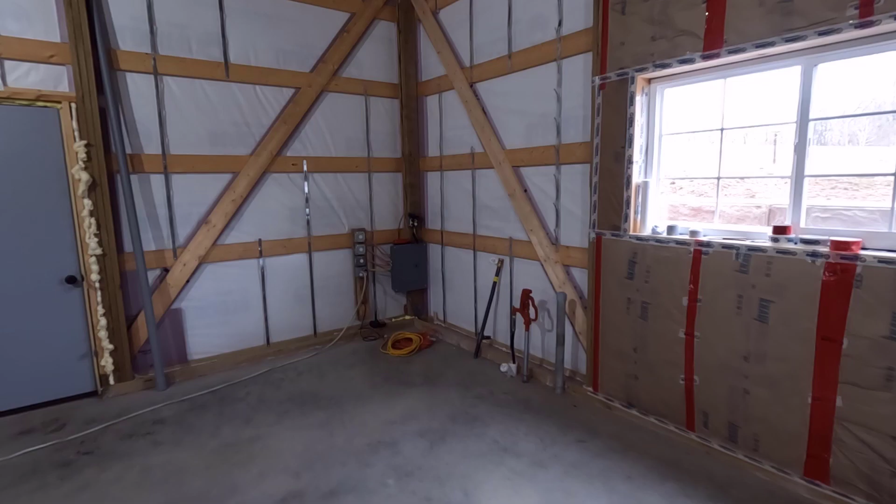Today I'm going to start installing the gas line into my post frame building.

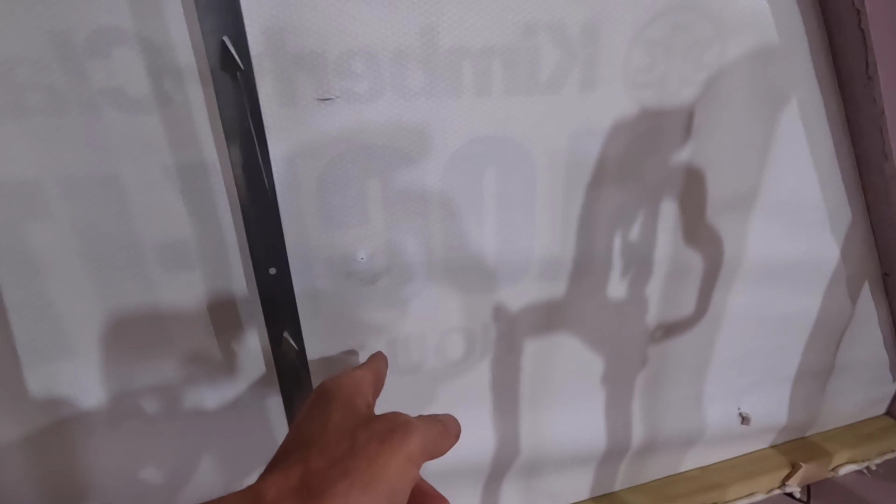Yesterday there is a gas line outside, a hose coming out of the ground, and it's just capped off. It's attached to our tank. You can't see the tank from here, but it's right over there. We have a line that goes underground up to right about here, and I measured the regulator on the house.

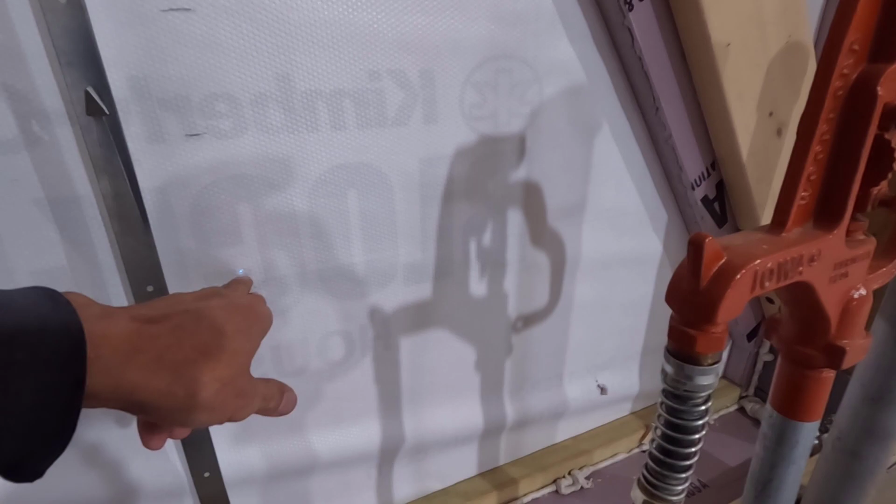Where it comes out of the wall, I measured the distance between the center line of the pipe going into the wall down to the fitting, and I came up with this height for the hole. This right here represents the girt that's going to come right through here, and this will be attached to the back of the girt. I have to open up this hole.

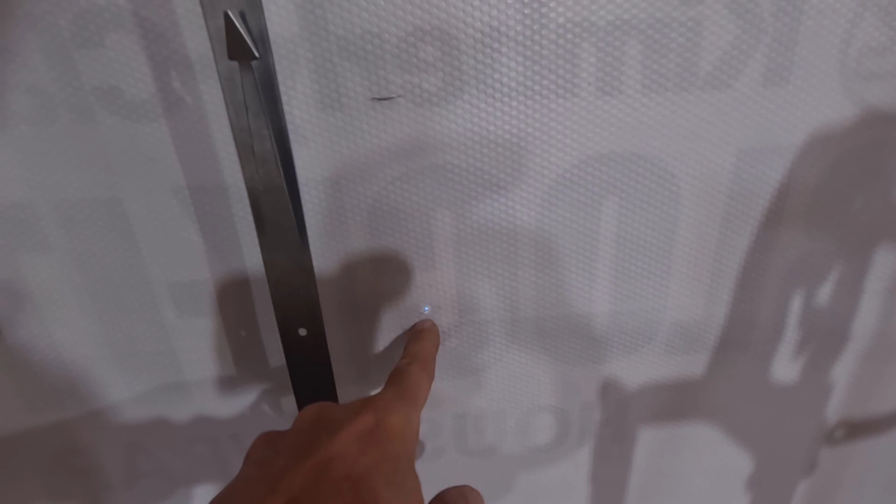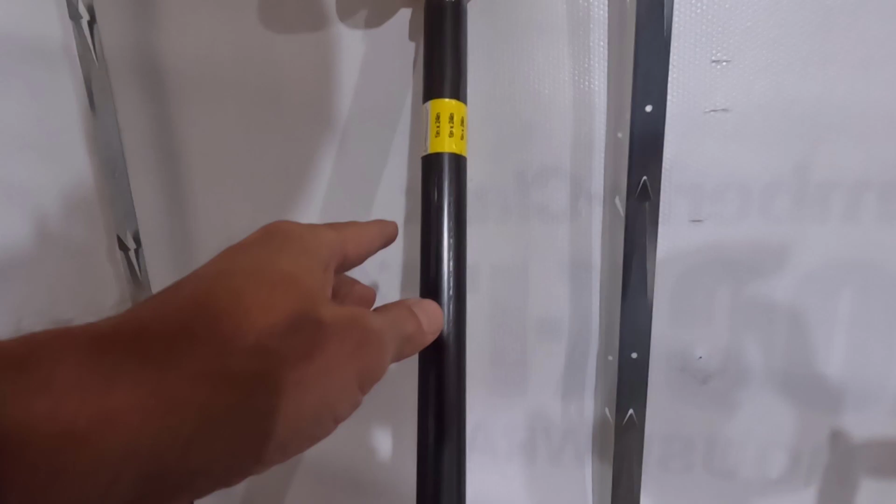This is going to be 1 3/8 inches. I have 1 inch pipe coming in, which is probably overkill, but I'm not exactly sure what's all going to be connected to this in the future. So I'm going to use 1 inch pipe up into the rafters up there, I think right over to that truss over there. And then from there, it's going to be 3/4 inch pipe going to the different locations.

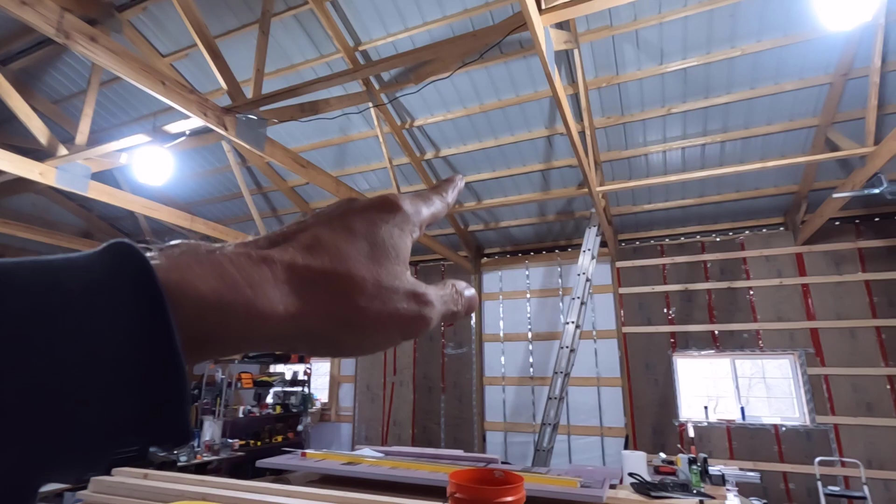Right now, there's going to be a heater right over there. So the pipe's going to go up and across, and then we'll have flex pipe going over to the heater. The joint up here is going to be a T, and we'll have another line going over into this area for a possible future heater.

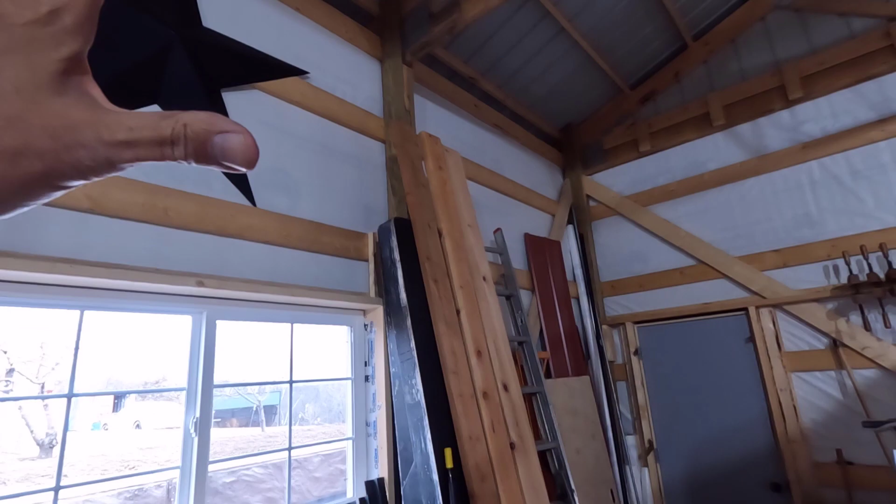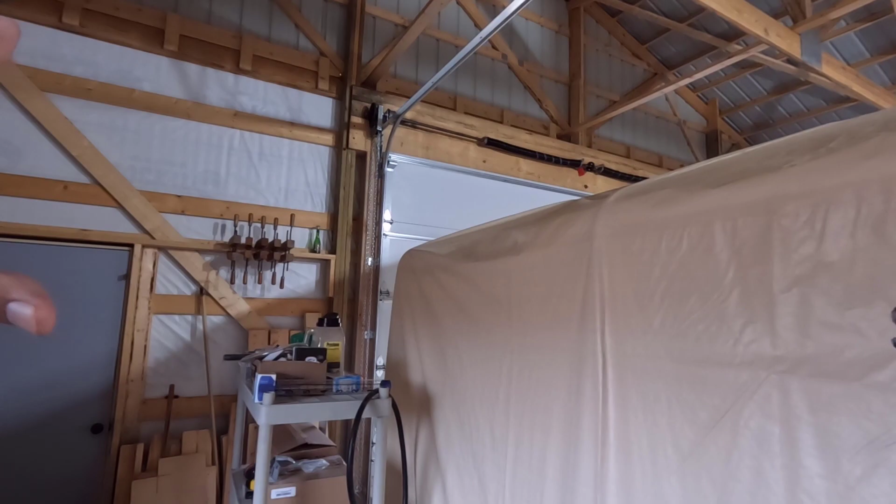This is going to be unheated space, but you can really warm up unheated space with one of these garage heaters. If we ever needed to work on a car or something like that in the winter, we could use it for that. I'm not really sure if we're ever going to do that, but I want to have the option for the future.

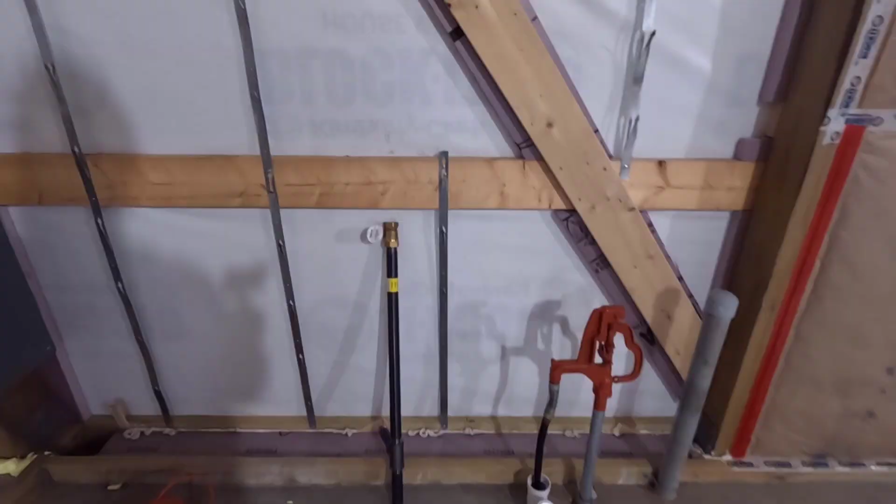This corner where the gas line's going in is the busiest corner in the building. It's got the water coming in, this is the permanent electric, and that's the temporary electric. A whole bunch of stuff has to happen for this gas line to go in.

The first thing I need to do, I have to go and shut off the electricity and unhook this box and this box from the wall, and this as well. I have to unhook all of this stuff and flop it down onto the ground right here. I didn't want to do that right off the bat. I probably should have. This doesn't make it all that much easier having it on the wall like this, but it is what it is.

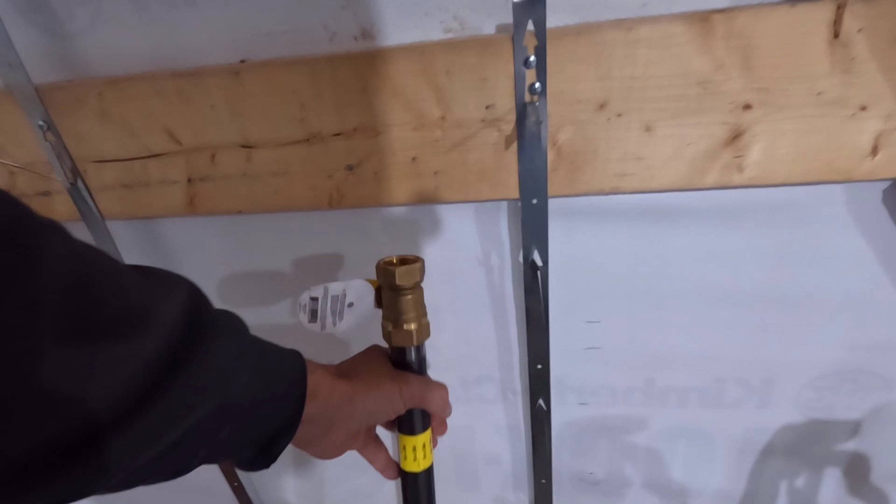I have to get this stuff moved down to the floor because I have to install 1, 2, 3 batts of insulation and then leave this open. Then get 2 girts in and attach my pipe to the back of the bottom girt right here.

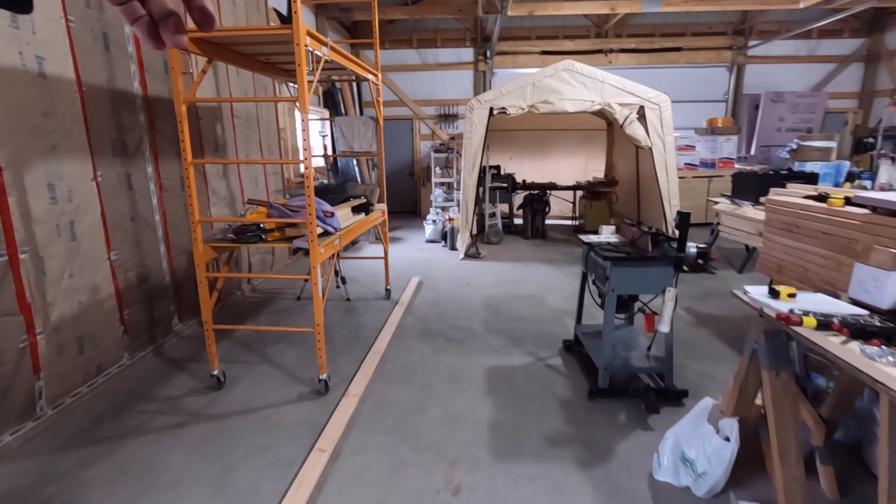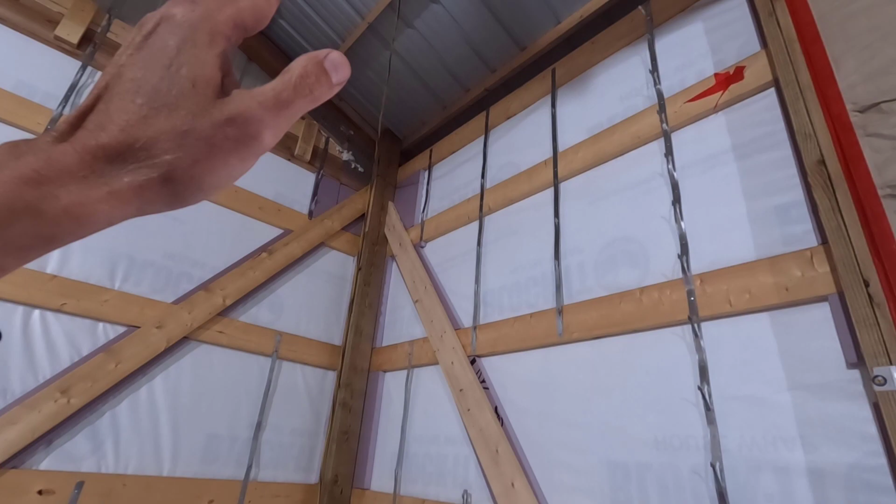Once that's attached, I have to take my other piece of pipe, I have a 10-foot piece over there. I have to screw that into it and loosely attach it up there and figure out what length it needs to be. I need to cut it, thread it, and then put an elbow on it.

That's going to get it over. It's actually going to come over right on the other side of this plate somewhere. So there is just a ton of work. This has to be cut down to 3.5 inches. A lot of work has to go on here.

And then once I have the pipe in place, I have to fit insulation around it. I'm not 100% sure how I'm going to do that, but I got a pretty good idea.

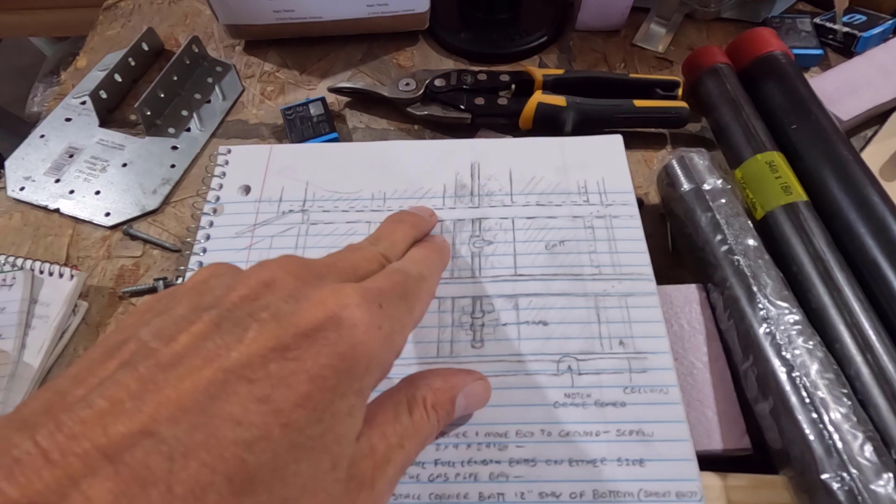I made a list of all the stuff I need to do last night. We got a batt here, a batt here, a batt here. There's the pipe behind the girt, this bottom girt. This is dashed because that won't be here at the time. So there's a lot going on with this.

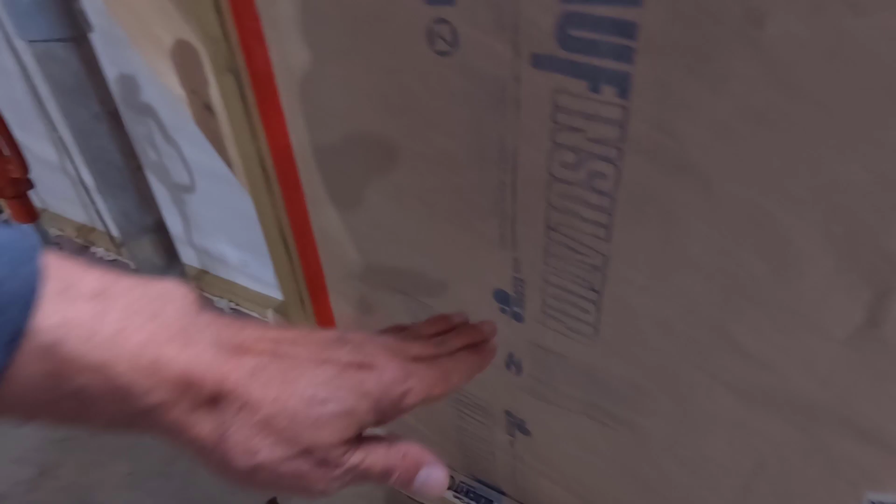There's the electric box on the ground. Oh, and I forgot to mention this: this corner batt is not going to come all the way to the bottom. It's going to be about 1 foot shy. It'll be cut about right there so that this area can be finished up.

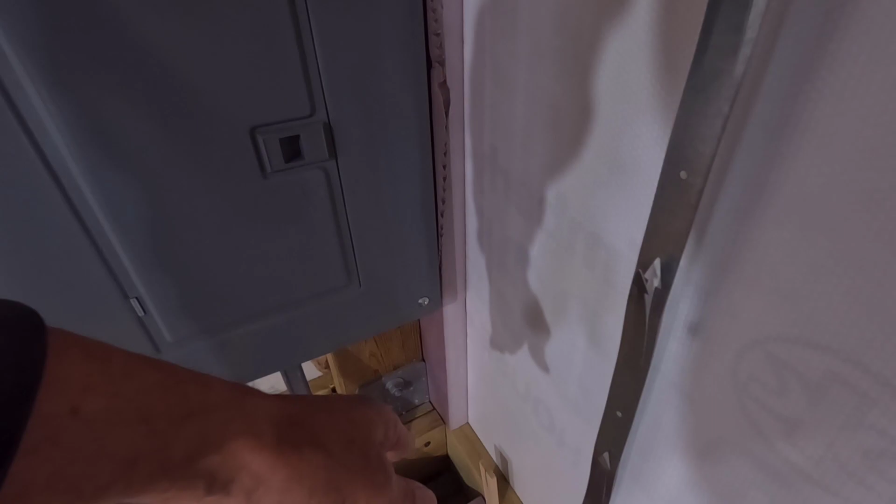Once the main electric is in place and I don't need this stuff anymore, this wire is going to be pulled back out. This will all be insulated. Then I'll put that last piece of batt into the bottom there.

Pretty complicated. It is pouring out there. Oh, not really, just the tin roof.

So I got to get out to the box there, shut off this electricity, and take everything apart, pull it off the wall. Then I can get started putting batts in here.

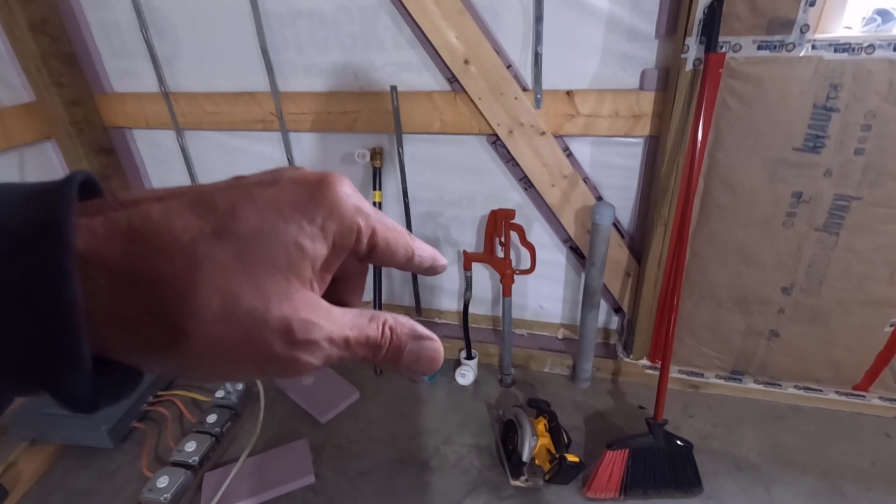Okay, I got that electrical work done, and I was going to clean up, but then I was thinking, I really need to get this stuff done.

I need to cut this pipe right about here. I have a jig for that. Then I got to take this bracket off, and I have to cut the grade board about 1/4 inch back so that this will fit on there.

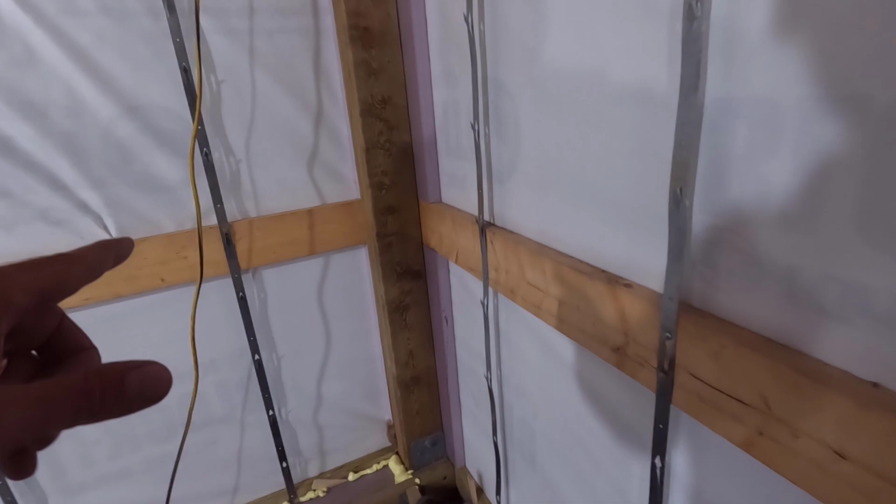I got to do a bunch of other stuff to it too, but before I clean up, I might as well get that done. Then I'm going to hang the batt in the corner, the one that only comes down to about here, and we're off to the races. Let's get this done real quick.

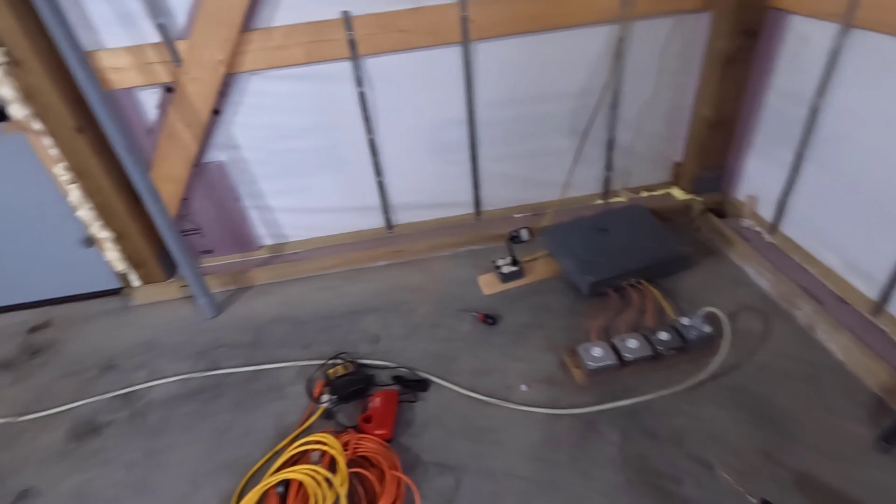As you can see, my little mess turned into a much bigger mess. Now I can get this all cleaned up and somehow squeak that ladder back into here so I can get this batt in place. Let me get this cleaned up first.

I already have a batt cut here, but that's not the right length, so I might as well cut all the batts right away and get them ready. Okay, let's get this done.

1 down, 2 to go. All right, that's 2 batts in. Okay, back to the drawing here. Electrical stuff on the ground.

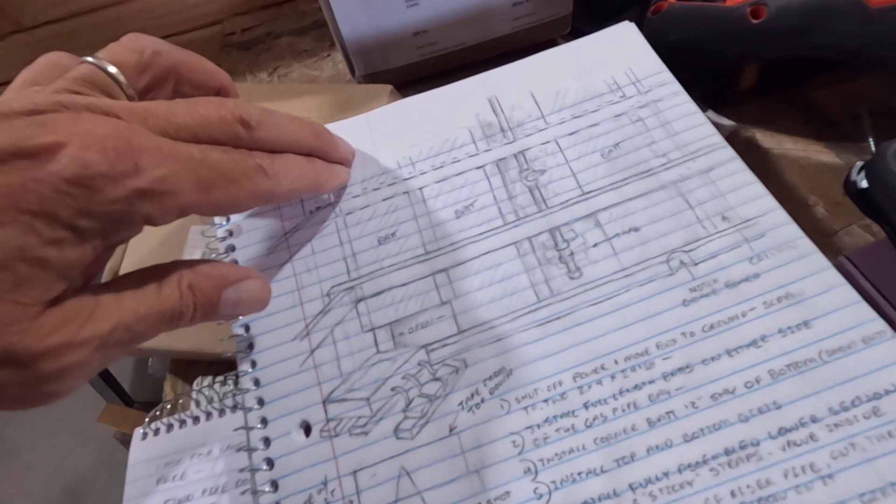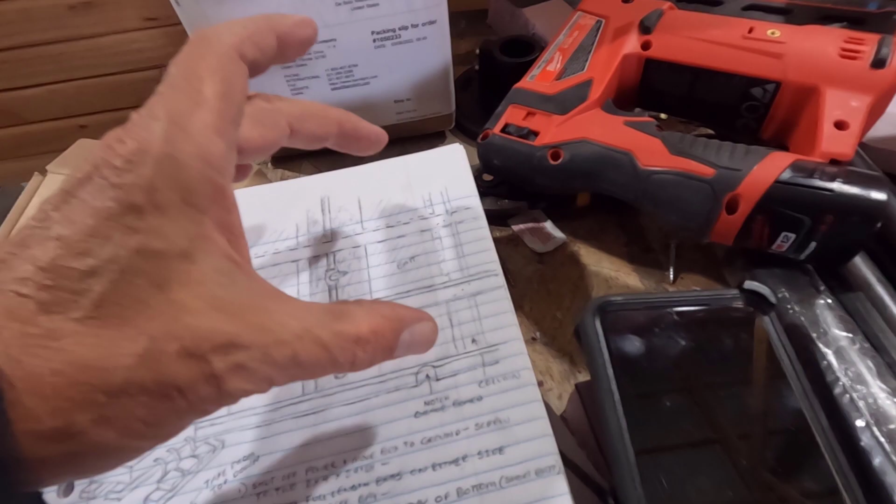We have a batt in here, and it's open at the bottom, like that. And we have a full batt in here. Then comes the gas pipe, then another batt. But the batt's got to go in first, at least 3 of them. So we got that 1 more batt, and it goes all the way to the right side.

Okay, I got my last batt in, got it all taped up and everything. Then I went around with my story pole, screwed it to the columns, and made all my marks for the bottom of the girts. Now that that's done, what step am I on?

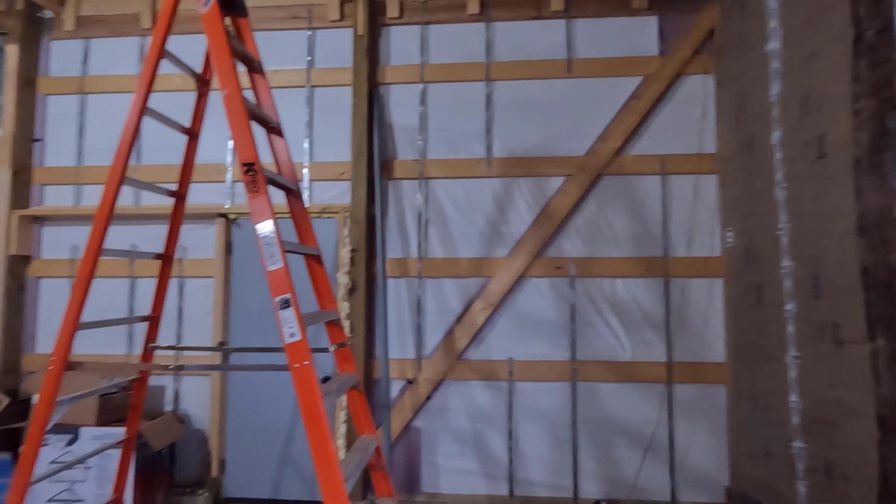I believe I'm on 4. Yes, install the top and bottom girts. To do that, I need to cut them to length.

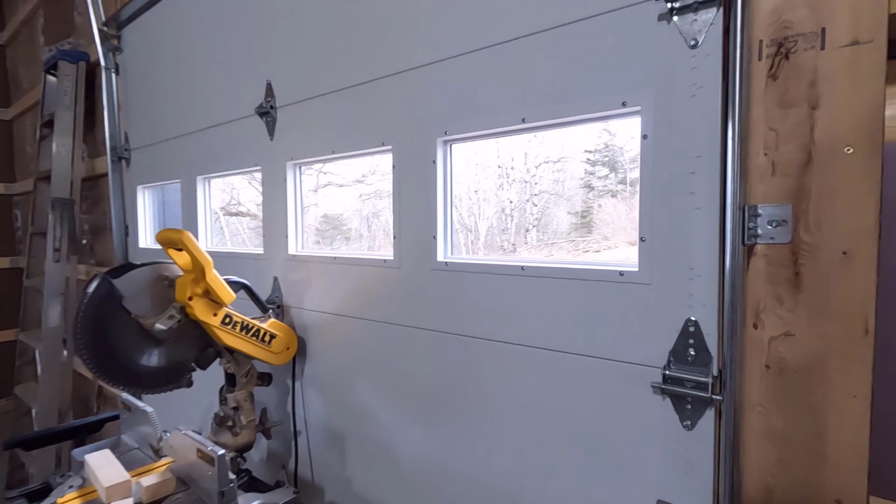So I'm hoping I can get a break in the weather. It was just raining really hard a little while ago, but now it looks like it's just pretty windy. All right, so I gotta run and go do something real quick, and when I get back, I'll cut them.

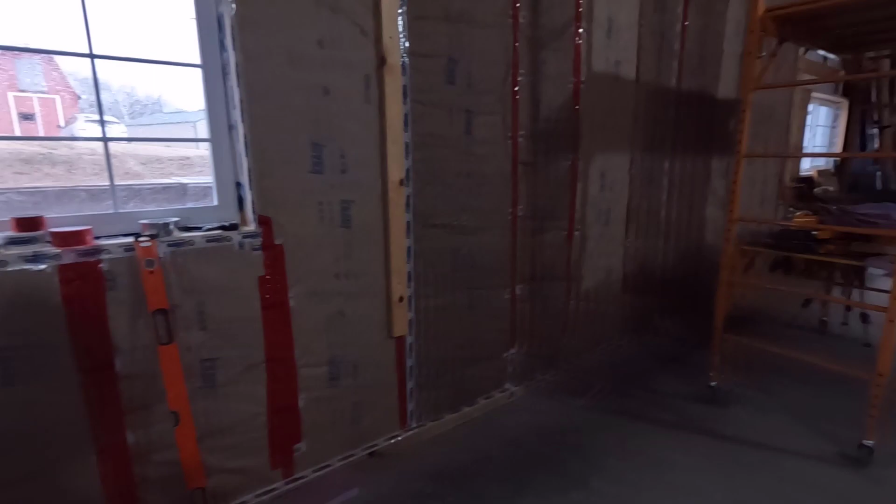Girts, we'll get them installed. Then I gotta run across the street to the machine shed. I have a real nice vise over there. I'll put it in the vise, get it all nice and tightened up, get the bottom capped off. Then I need to drill the proper size hole through the wall.

Hopefully the rain will be done. I got to clean off the outside out there. Once I get the pipe through there, I have to put like a tape flash over it so I don't get water coming in here.

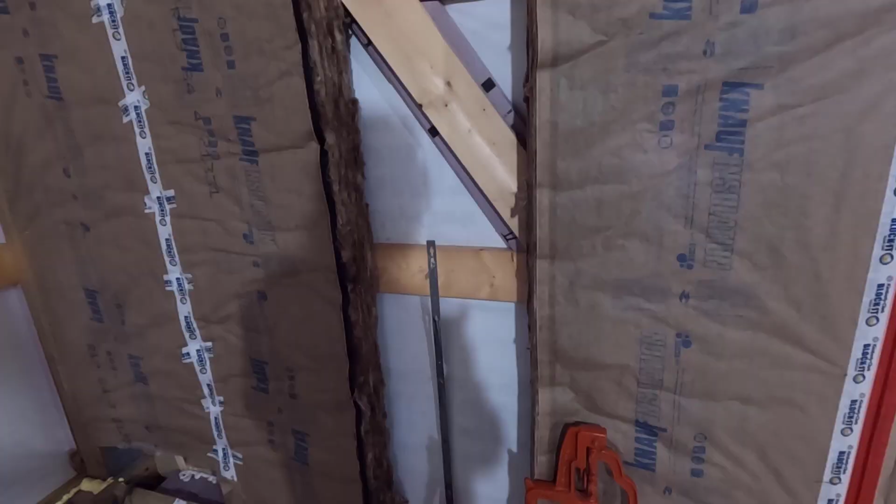I'll show you that when I get to it, but it should go a little faster from here on in, but I believe this is going to take at least 2 days, but we'll see how much we can get done today.

All right, I got that girt cut. It is super windy out there. Yeah, you could probably see that. And it's drizzling out, so I moved the saw just outside the door, got my cut done.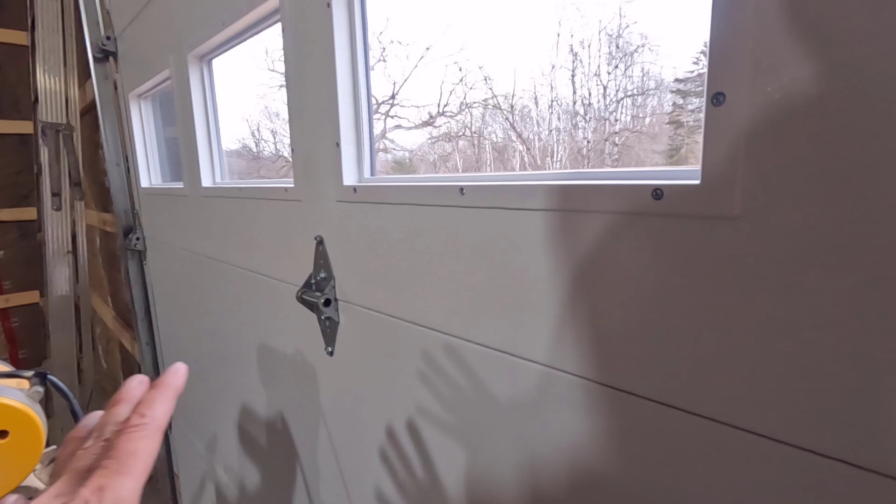Luckily, I only needed one. I had a girt left over from that wall there, and this is the one I cut. I got it installed right away. I have everything marked to get the rest of them installed, but the only one I'm installing now is the top one. But I'm actually going to do that tomorrow.

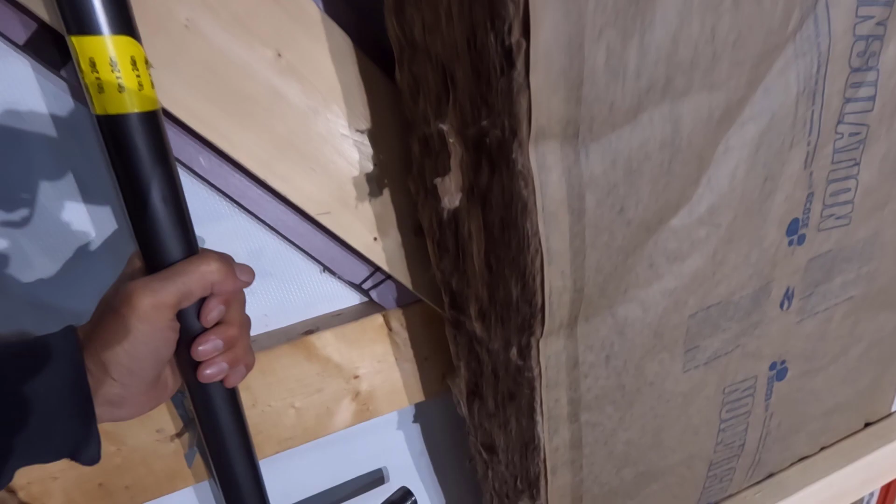And like I said, I got to get the tape on all this over across the street, and I'll be doing that tomorrow as well. So this is going to go in right like that, and it'll attach to the back side of this girt, and then I'll be screwing in the tall pipe that goes way up there to the top of this valve right here. But like I said, that'll be tomorrow, but for you, it'll just be seconds.

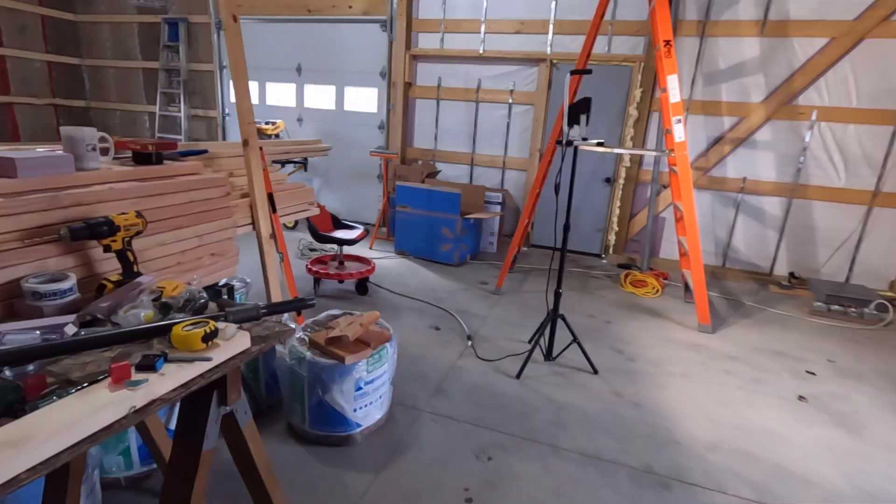It's actually 2 days later, but it's time to go get this all tightened up. This vise has been real handy over the years. That's a Yost vise, super nice. It has the pipe jaws on the bottom and regular jaws on top, and it's super adjustable.

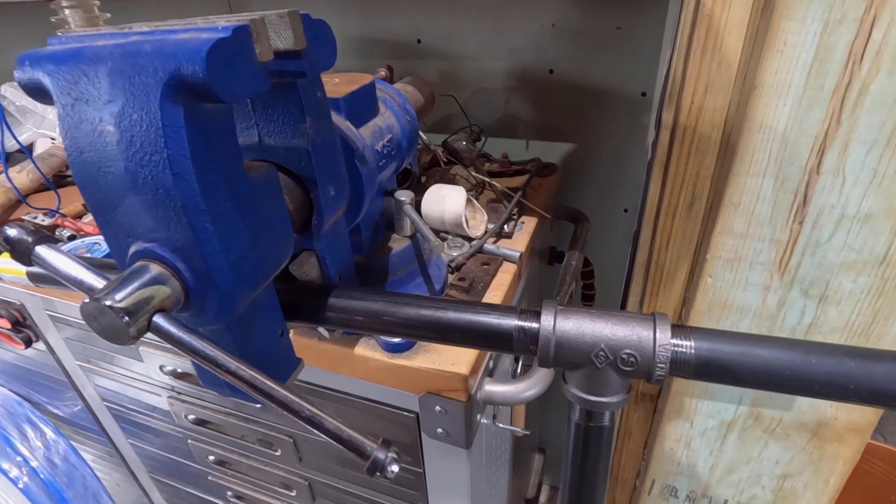Otherwise, we're going to get some tape on this and tighten this up. I'm going to be using Blue Monster pipe thread tape, and I'm not sure if you're going to be able to see this or not, but it's rated for natural gas, methane, propane, butane, and petroleum distillates. If your tape's not rated for petroleum products, don't use it.

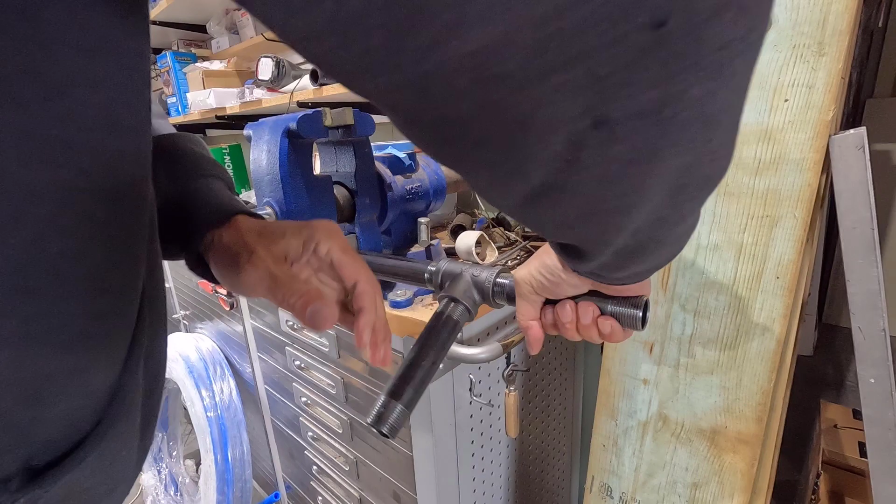Pipe only goes about halfway onto the thread. You need 3 layers of the tape, and it's going to take 2 passes to cover the area. So you got 1, 2, 3, and for good measure, and there we have it.

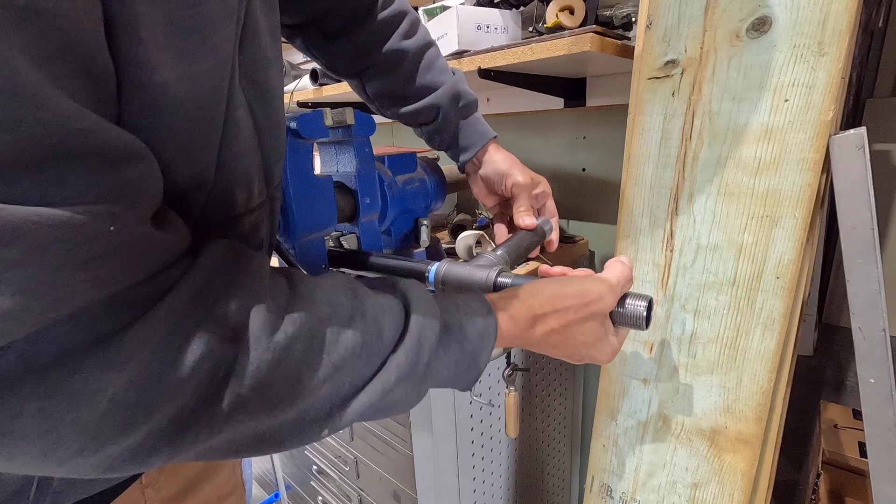Get that started, and I'll take this one off, and then tape this. Tape it right here.

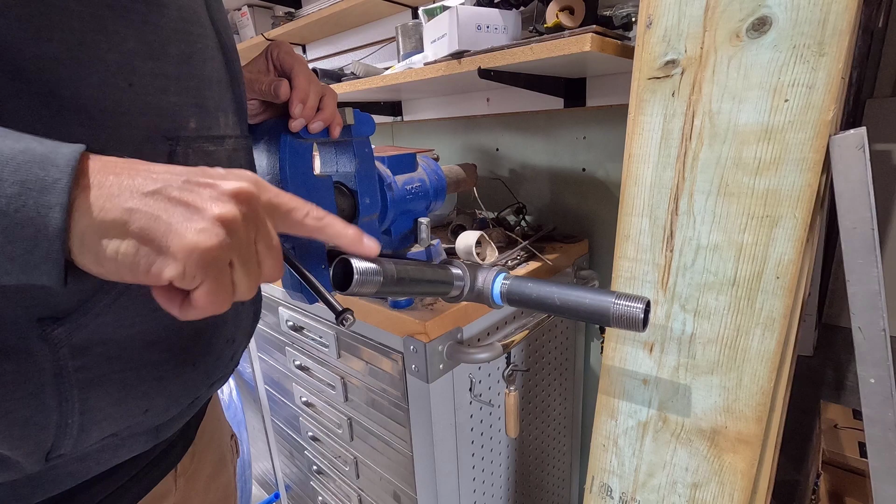Unfortunately, I couldn't find the cap for this, so I'm going to have to do that after it's installed. And actually, I believe I have to do this after it's installed as well, because I'm not 100% sure that this is going to be the right length. I think it is. Yeah, I'll just tape this anyways. If it's wrong, I can retape it.

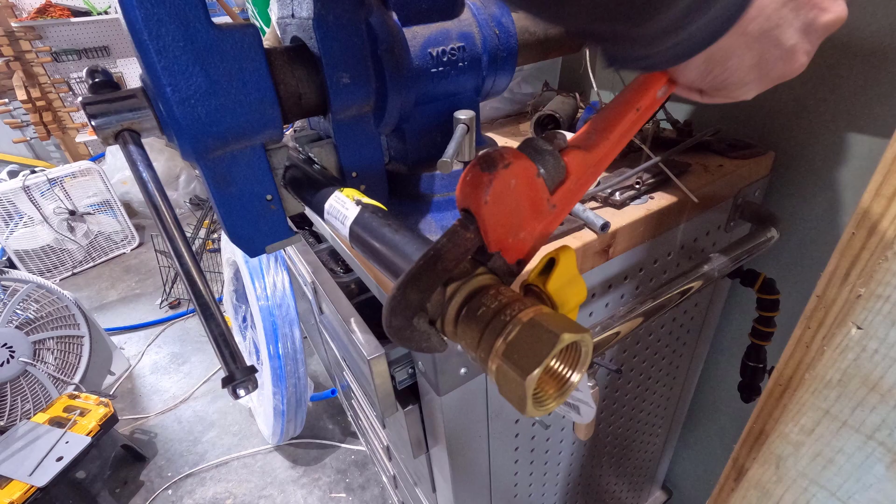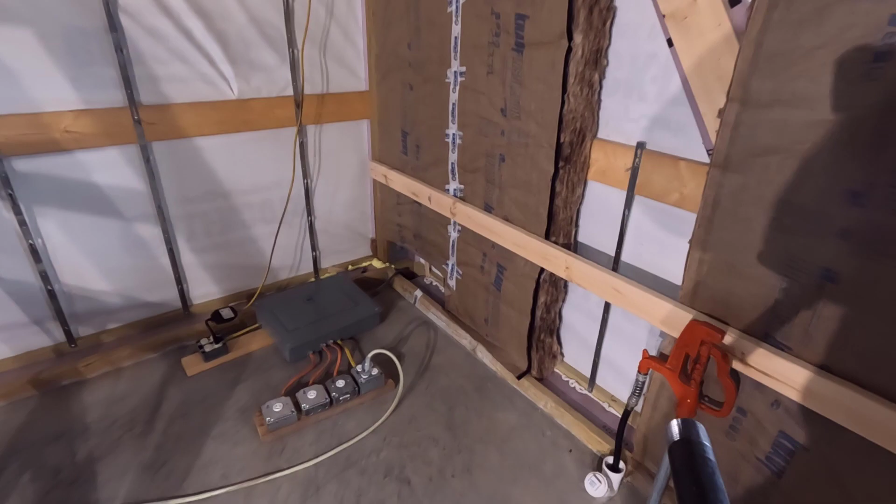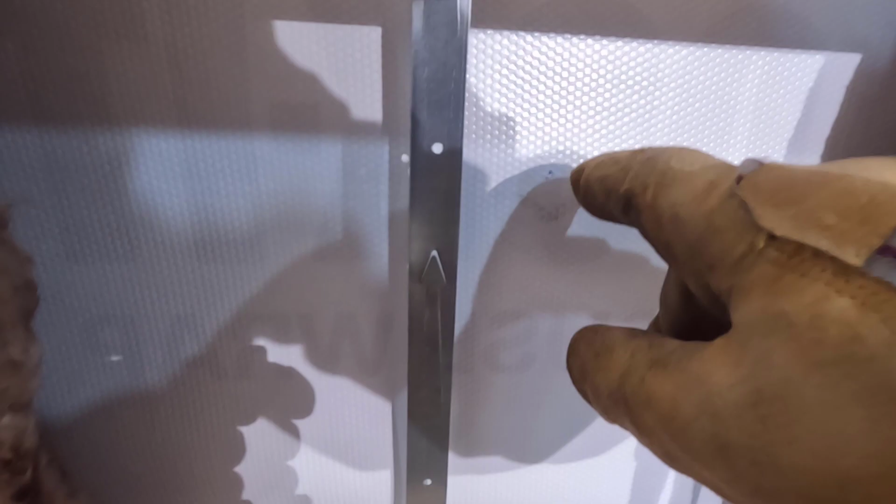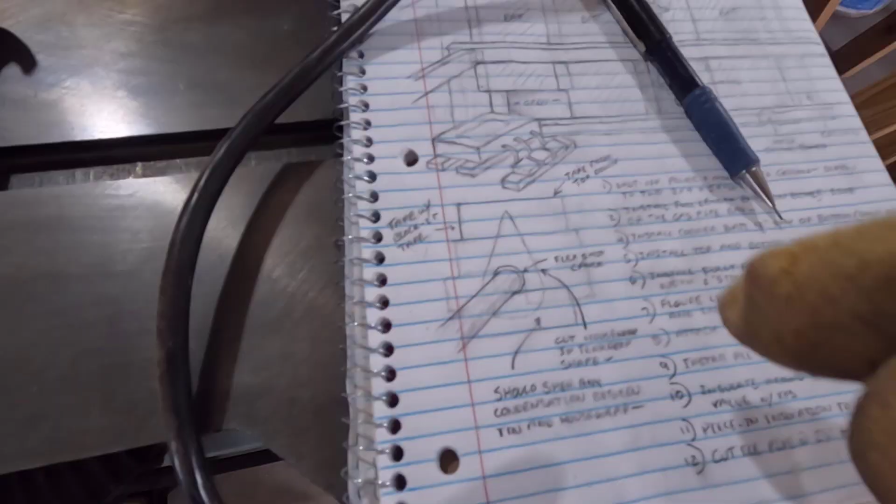With this entry assembly completed, now I need to drill the right size hole through there. But before I do that, I need to cut this house wrap in a teardrop shape, because condensation may form on the outside between the house wrap and the tin. As it rolls down, the way it is now, it goes down to the bottom of the trim and out to the ground. But if I cut that hole square and tape it up, I'll get condensation trapped at the top. If I don't tape it at all, any condensation will just run right into the building. So I have to cut a teardrop shape, so condensation coming down on the inside will hit that, move around it, and make its way out of the building.

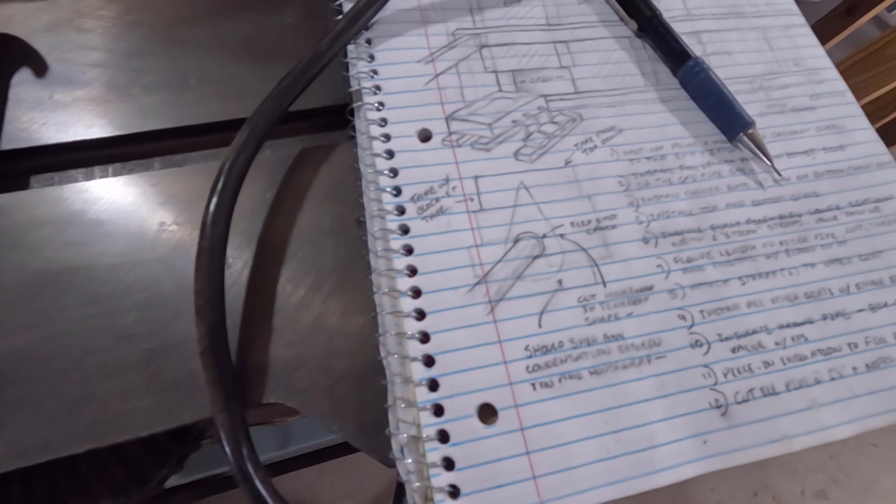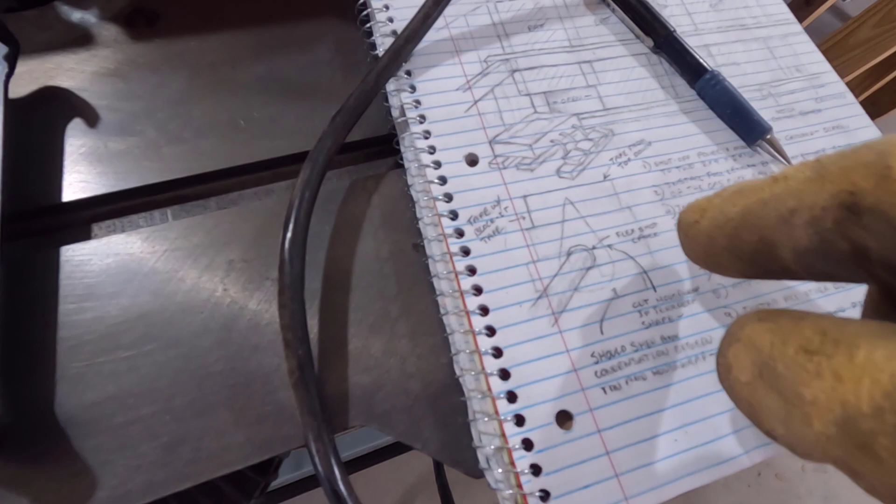I'm also going to seal this with flex shot caulk, but that hasn't arrived yet, so I'll just get this cut and get the tube through to the outside. That'll be all I can do with this area for now. Then hopefully I can get this next section in.

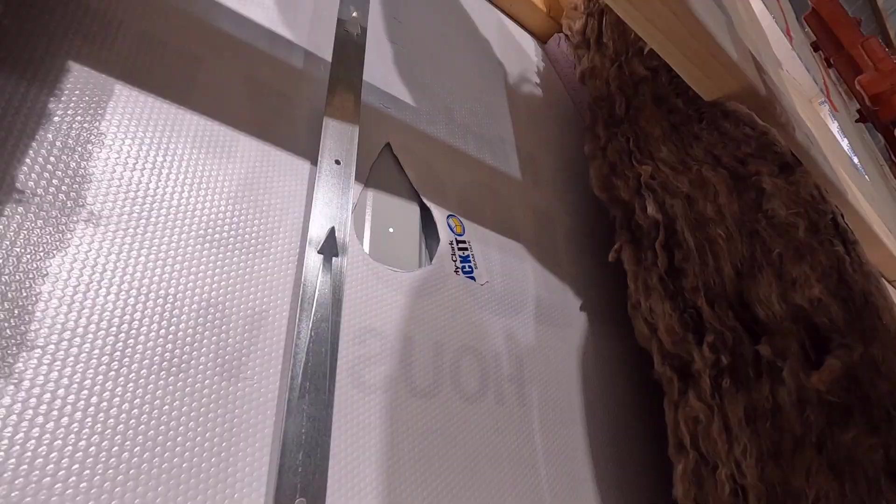It's a little crooked, but it's going to work just fine.

Now it's time to go outside and drill the hole into the building. It's kind of windy out there, so I'm not sure how well the audio is going to do. I have a pitcher of water, because you've got to lubricate the cut — if you heat this metal up too much, you'll damage the galvanizing. I have a brand new hole saw, so hopefully everything goes good.

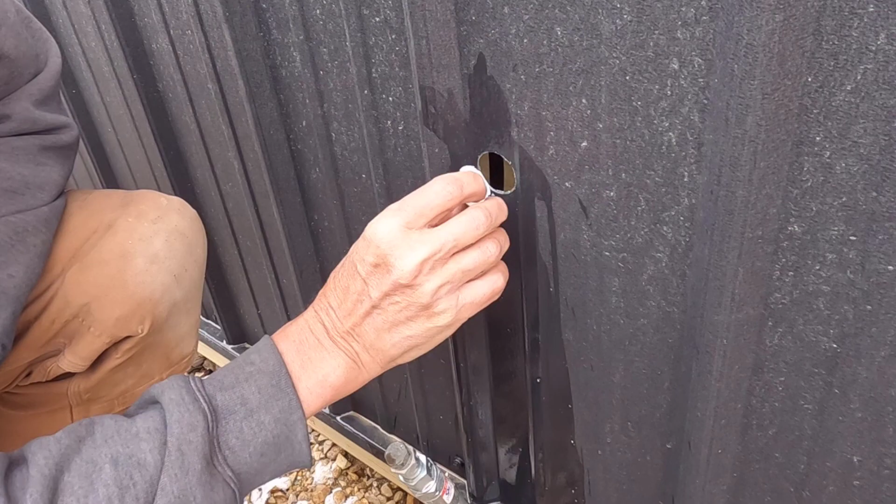I'm going to get a file and file this smooth, and that should do it.

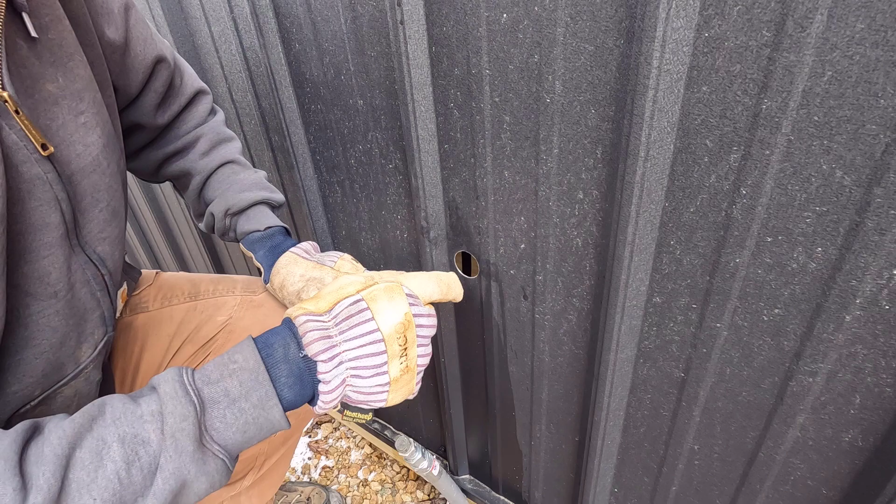Now I'm going to get a paper towel and clean this area up a little bit. Once I get the pipe through there, I'll have to seal the end of the pipe. I don't have the cap for it yet, so I'm going to put this tape over the top of it so water doesn't get through when it rains.

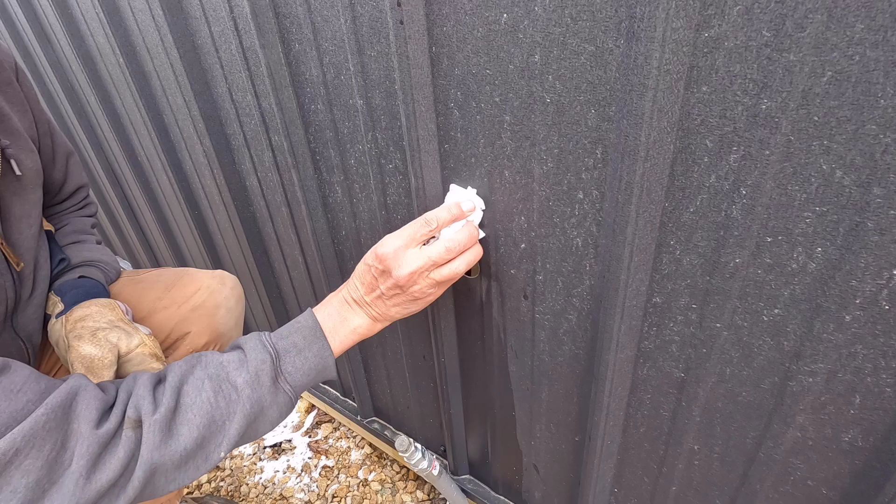Holy moly, is it windy here. Hopefully that's not messing up the audio too bad.

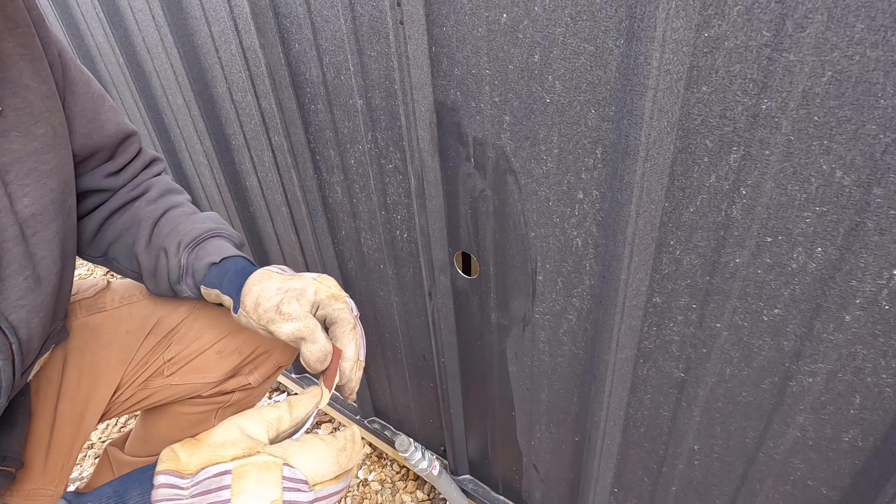Soon we'll be back in the building. A little bit of sandpaper too. Okay, good to go.

Yeah, that looks really nice. It got a little wet in here, but that's not going to matter — this lower part is designed to get wet like that and then dry back out. But we'll get rid of some of the excess.

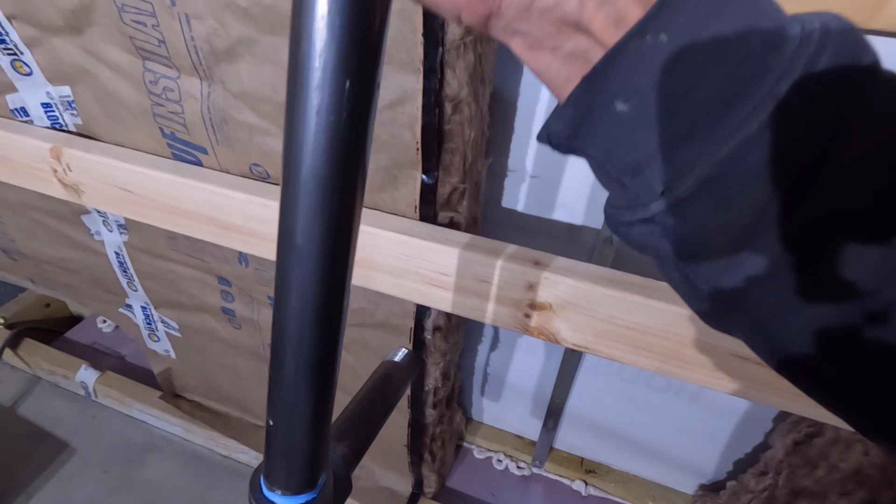All right, now this is going to be real close. It's probably going to end up a little short.

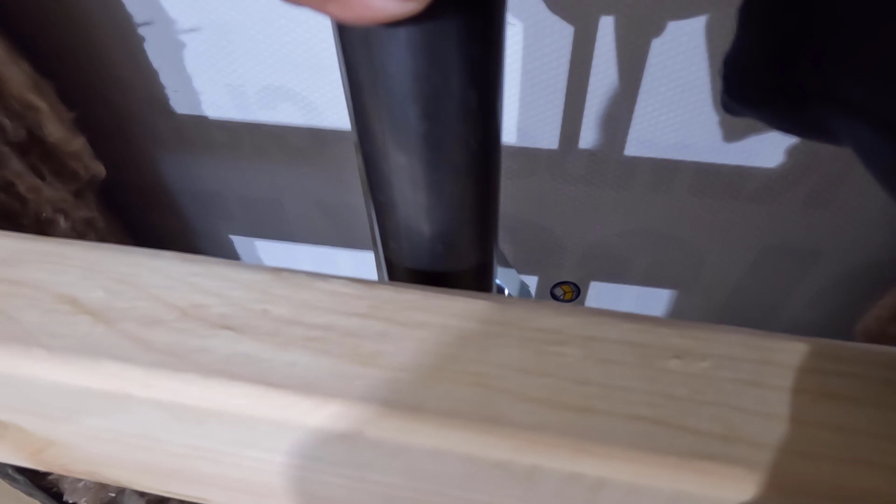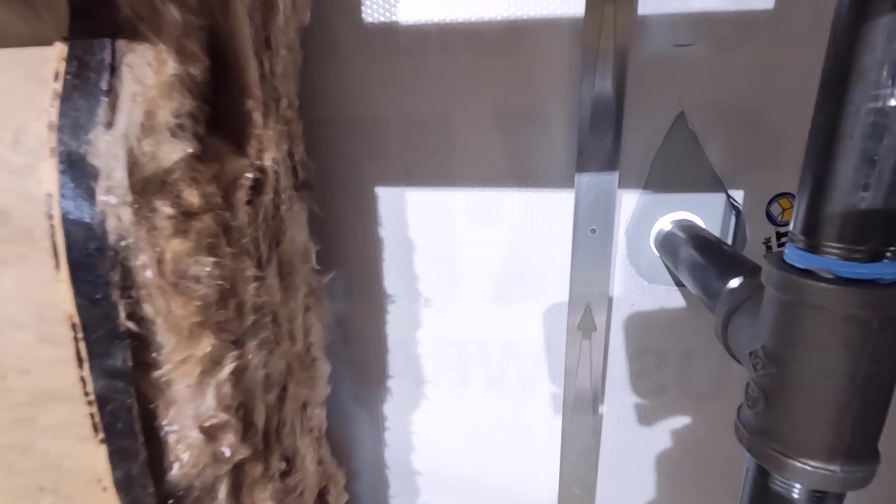Okay, we only have about a quarter inch of thread going out there, which is not enough. And oh, this is tightened down.

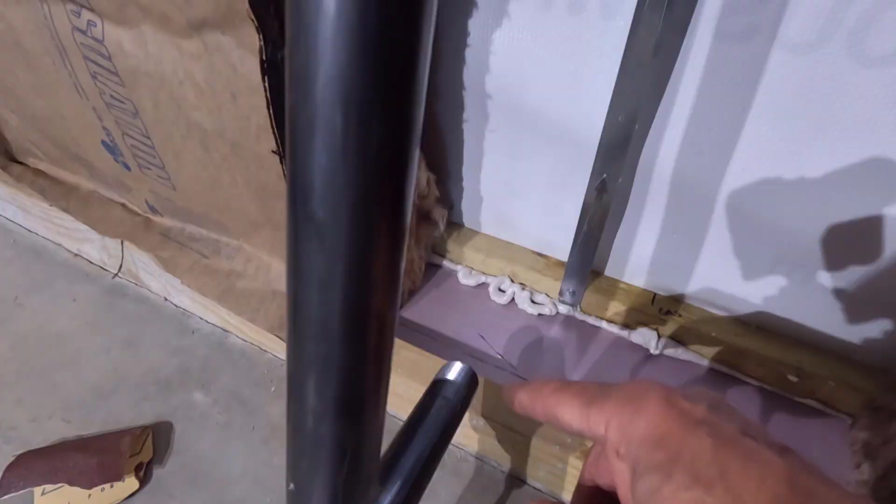What I'm going to have to do now is take this off, and I'm going to cut one about a half inch, maybe three quarters of an inch longer than this, and thread it. The next size up nipple is 2 inches longer, and if I used that, well, they don't even have them at Menards — I was going to get one but they didn't have them. But even if I did use that, it would put the regulator too far out into this passageway. This passageway is really narrow to start with, so I want that meter to hug the building. It's a bit of extra work, but let's go get that cut.

Okay, we ran into a snag. I was going to thread this, but my pipe threader does not go up to 1 inch — it has 3/8, 1/2 inch, and 3/4 inch, but not 1 inch. So until I can remedy that, this project is on hold, and this video is getting too long, so I'm just going to end it here.

Okay, I got this taped up. That should hold it until I'm ready to get back to this.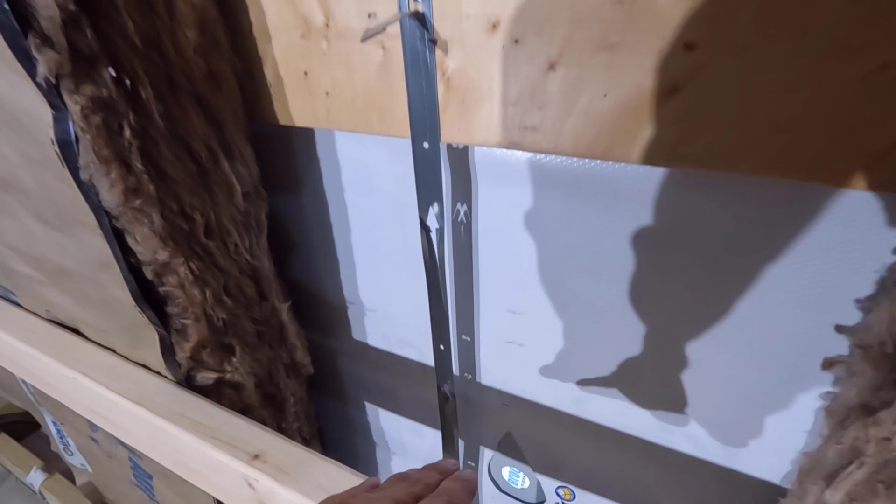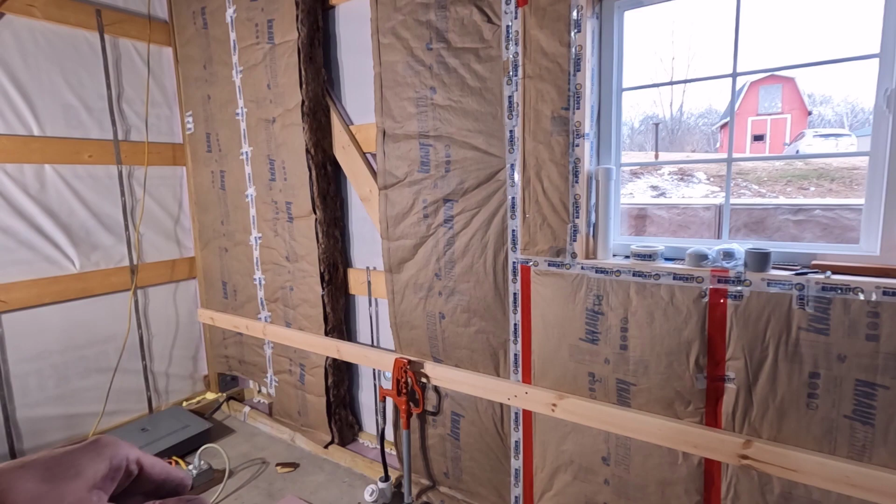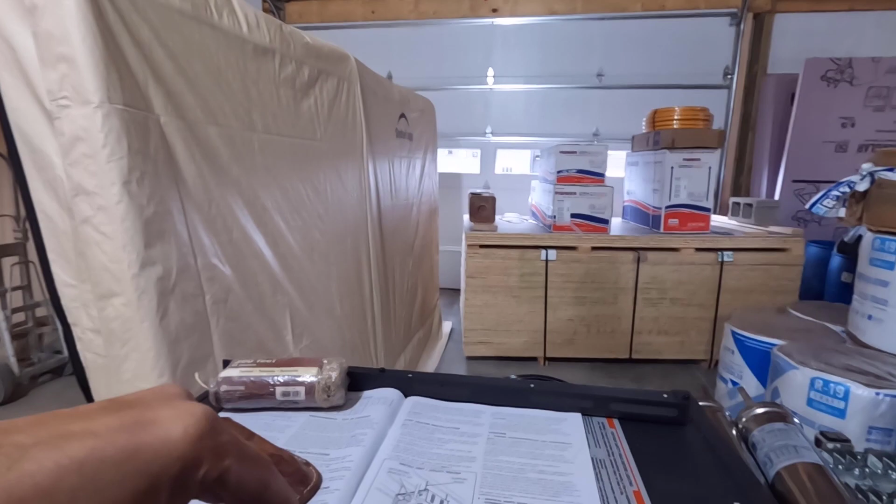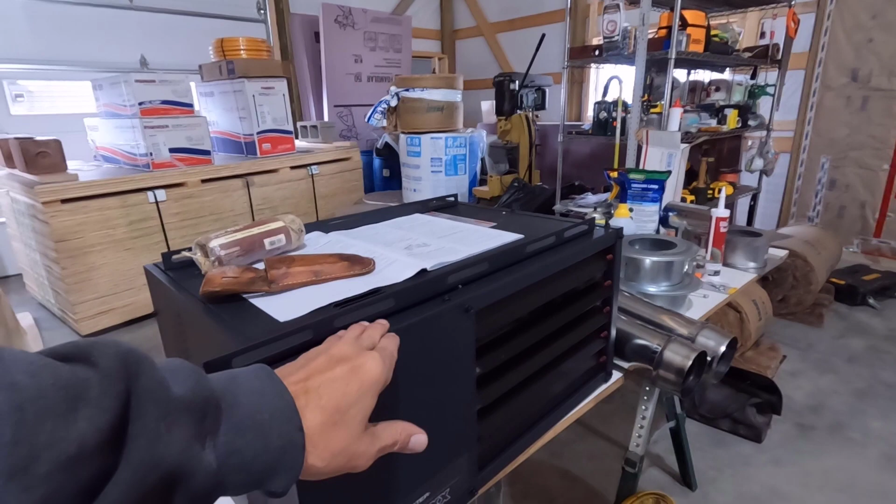I'm probably going to have to make this into 2, maybe 3 videos, because once I get that threaded and get that part done, I have to put the pipe up. I have to go over the truss, come over to this one, and then run that flexible stuff — not sure what that's called, that stuff on top of the mini split — over to this side. But in order to know where I'm going on this side, I have to get the bracketing put in, which is this stuff here. I have to do a bunch of woodwork up there and then get the brackets in. Once the brackets are in, I'll know exactly where this is going to sit, and then I can bring my gas pipe down to connect to it. It's going to be pretty complicated, but I should be able to wrap the gas up in 3 videos, and I'll make a few more with this as well — there's woodwork, bracketing, electric, gas, and an exhaust involved. So a lot of work there.